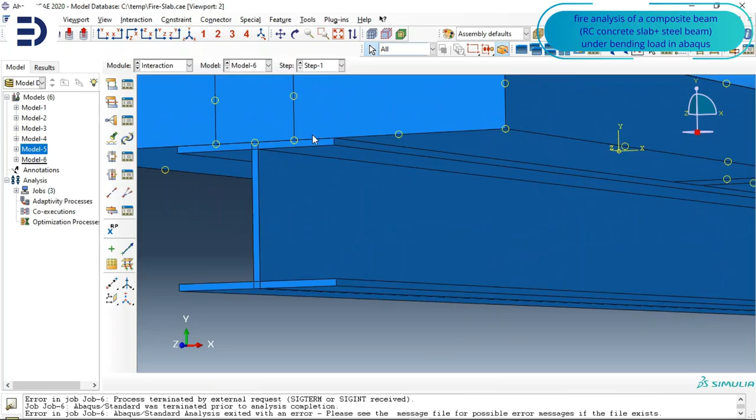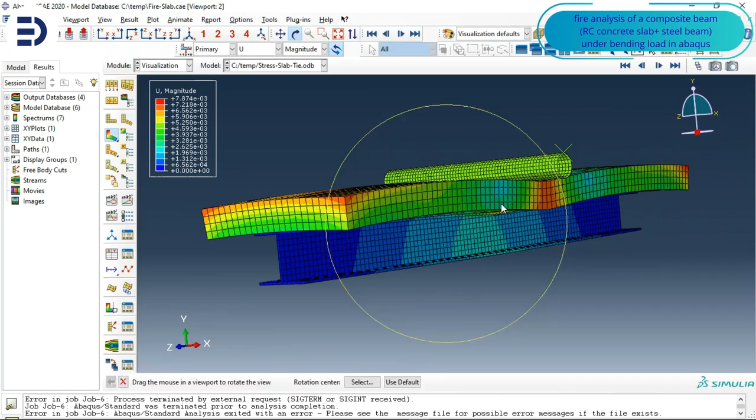Fire analysis and simulation in structural engineering is a specialized discipline dedicated to predicting how buildings and structural components behave when exposed to elevated temperatures during fire scenarios. The primary objective of this field is to ensure life safety, evaluate fire resistance, and design structures that can maintain stability and load-bearing capacity for a sufficient duration to allow evacuation and firefighting operations.

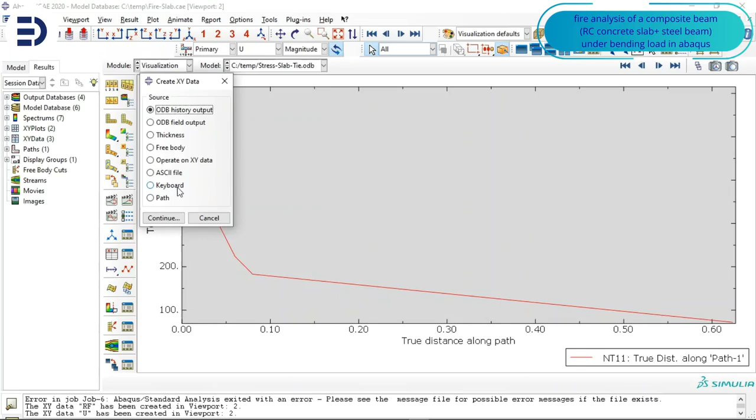Fire simulation integrates thermal effects, material degradation, boundary conditions, fire dynamics, and structural mechanics in order to realistically capture the complex interaction between heat exposure and structural response.

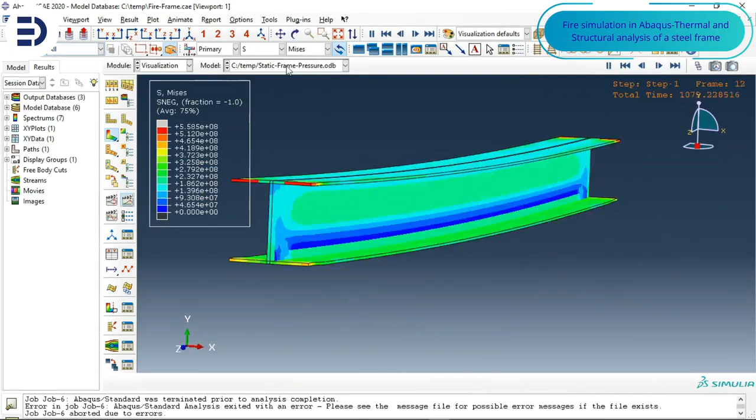At the core of fire analysis is the estimation of the thermal loading that structural components experience during a fire. Engineers must first define the time-temperature history imposed on the structure using appropriate fire models. These may range from standard fire curves used in design codes to more advanced parametric or natural fire models that account for ventilation, fuel load, and compartment geometry.

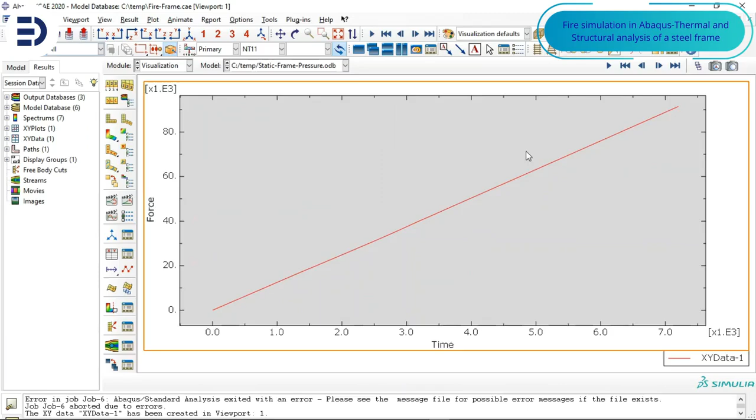In sophisticated analyses, computational fluid dynamics can be used to simulate flame development, gas temperatures, heat fluxes, and smoke movement. The resulting thermal data form the basis for subsequent structural analyses, as they determine how heat is transferred into beams, columns, slabs, and connections over time.

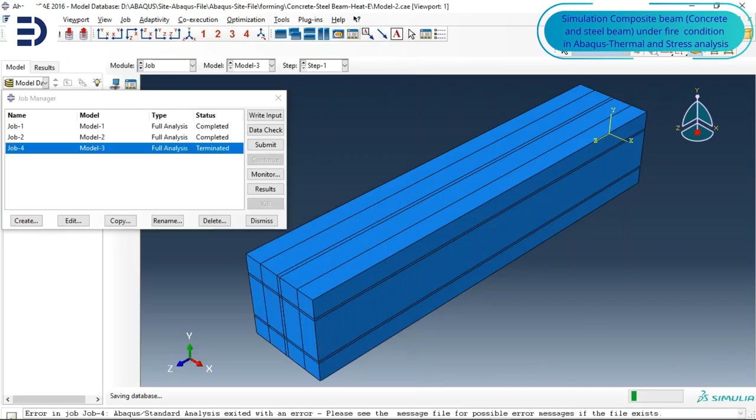Structural materials exhibit significant changes in behavior when exposed to high temperatures. Steel components experience a rapid reduction in stiffness and strength as temperature rises, with substantial loss of load-bearing capacity occurring at elevated temperatures. Thermal expansion of steel can generate additional internal forces in restrained members, while reduced yield strength may trigger instability and buckling.

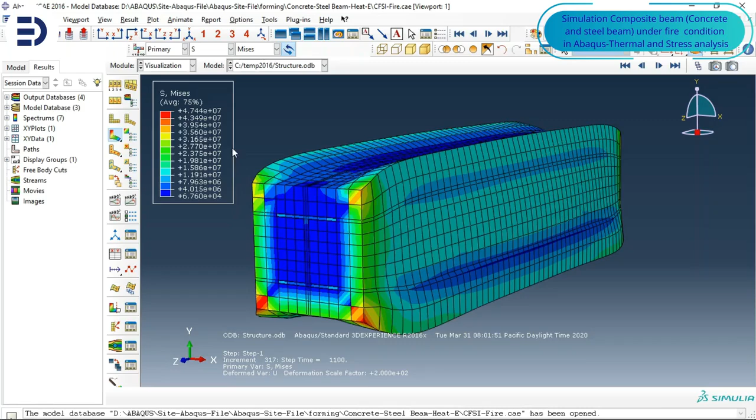At very high temperatures, beams may develop catenary action, redistributing loads through axial tension rather than bending, and connections such as bolts and welds often become critical points of failure. Accurate fire analysis therefore requires temperature-dependent material models consistent with established design standards and advanced finite element formulations.

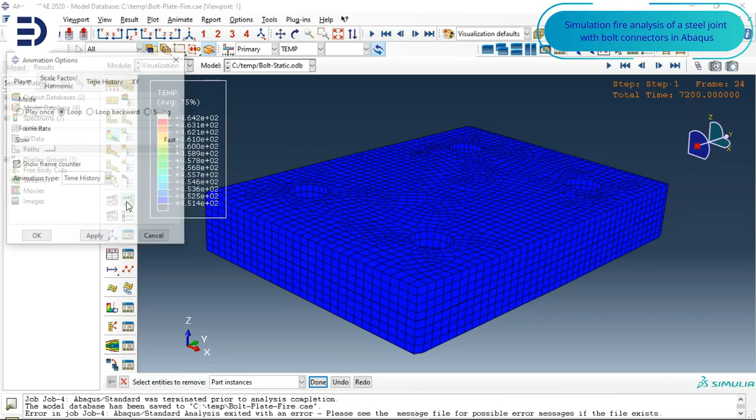Concrete structures respond differently to fire exposure. As temperature increases, concrete strength and stiffness decrease, particularly in compression, and severe thermal gradients may develop across slabs and walls. Reinforcement steel embedded within concrete must be tracked separately, as its temperature rise governs the residual capacity of reinforced concrete members.

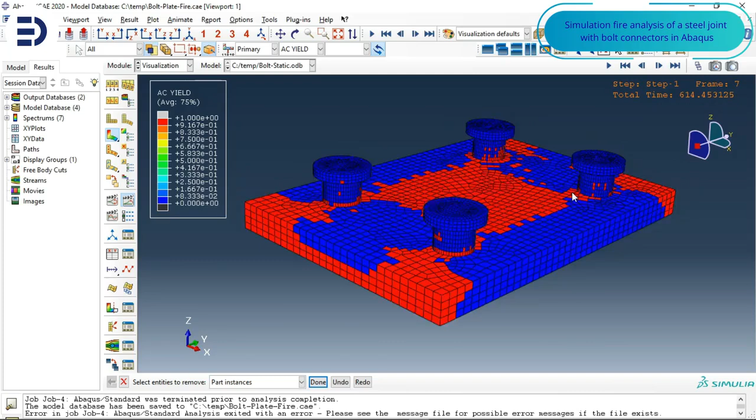Fire-induced cracking, degradation of bond between concrete and reinforcement, and spalling caused by moisture pressure and thermal gradients can significantly reduce structural capacity. These phenomena must be incorporated into nonlinear material models to realistically predict structural performance under fire conditions.

The response of individual structural elements under fire loading varies according to their function and boundary conditions. Steel beams subjected to fire typically undergo downward deflection as temperatures rise, forming plastic hinges and potentially transitioning into catenary action at extreme temperatures. Steel columns are particularly sensitive to fire due to buckling, as their axial load capacity decreases sharply with temperature, often governing fire protection requirements.

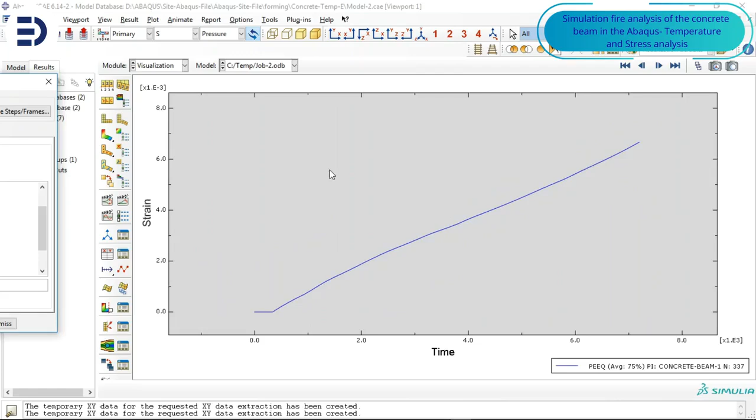In steel frames, global behavior such as load redistribution and restraint effects can either enhance redundancy or increase thermal stresses, with connections frequently dictating the overall failure mode.

For concrete beams and slabs, temperature gradients generate internal stresses that lead to deflection and cracking, while membrane action may develop at high temperatures. Concrete columns experience altered buckling and crushing behavior, with spalling posing a major risk to load-bearing capacity.

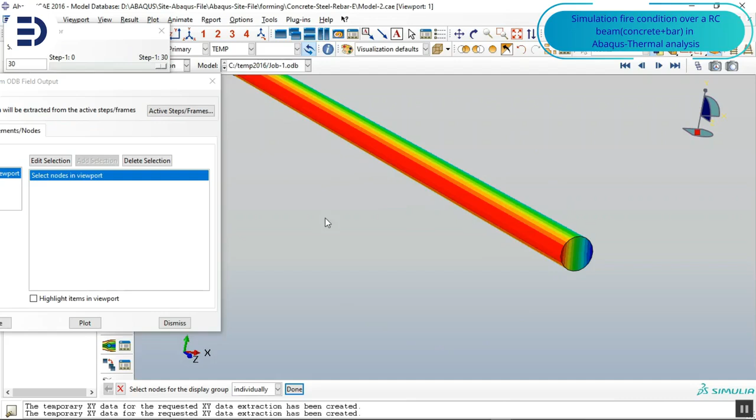Fire analysis can be conducted using simplified hand calculations based on design codes for preliminary assessment and quick verification, or through advanced finite element modeling for detailed evaluation.

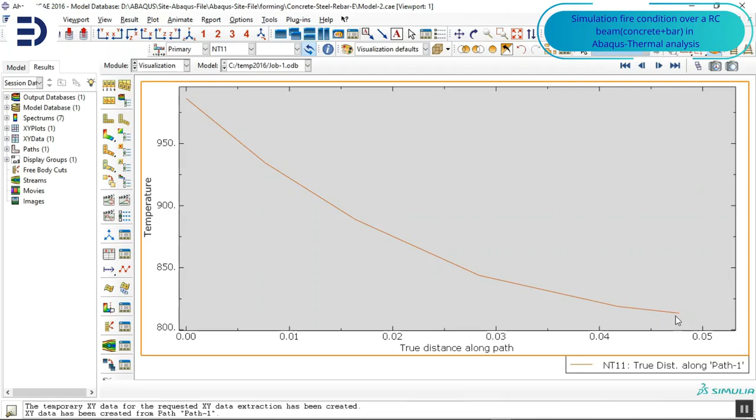In numerical simulations, thermal analysis is first performed to compute temperature distributions using appropriate convection, radiation, and material properties. These temperature fields are then applied in structural analyses that incorporate temperature-dependent material laws, geometric nonlinearity, and connection flexibility. Simulations may be sequentially coupled or fully coupled, depending on the required level of accuracy and computational effort.

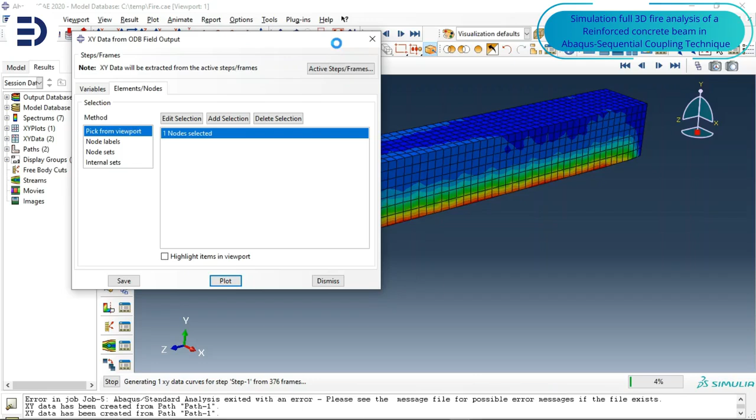Modern practice increasingly relies on performance-based fire engineering, which moves beyond prescriptive code requirements to evaluate how a specific structure behaves under realistic fire scenarios.

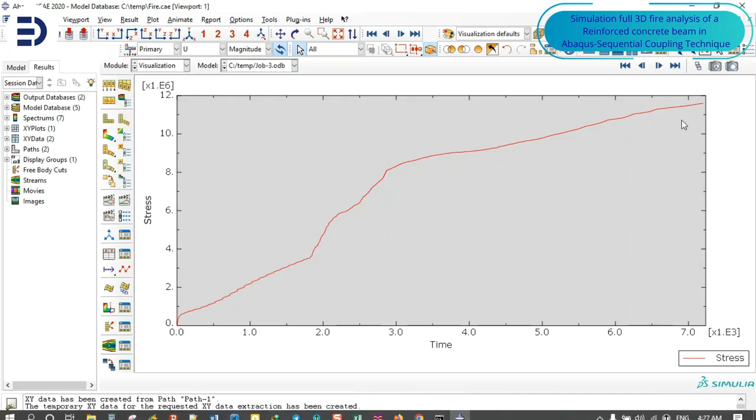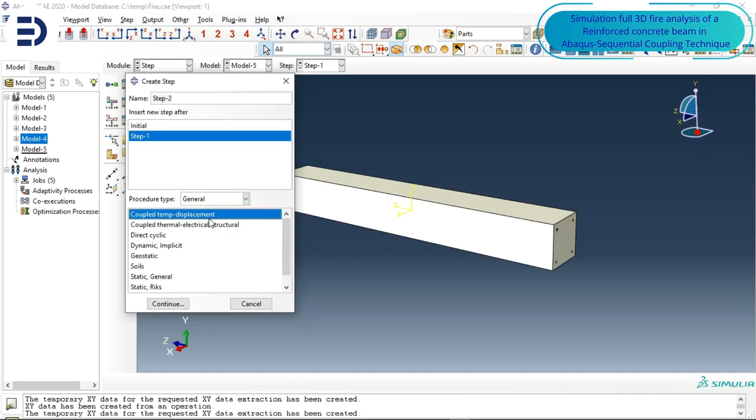This approach involves defining credible fire events, performing detailed thermal and structural analyses, and assessing safety margins, stability, residual capacity, and failure mechanisms. Performance-based fire engineering is widely applied in complex structures such as high-rise buildings, industrial facilities, tunnels, bridges, and steel-concrete composite systems.

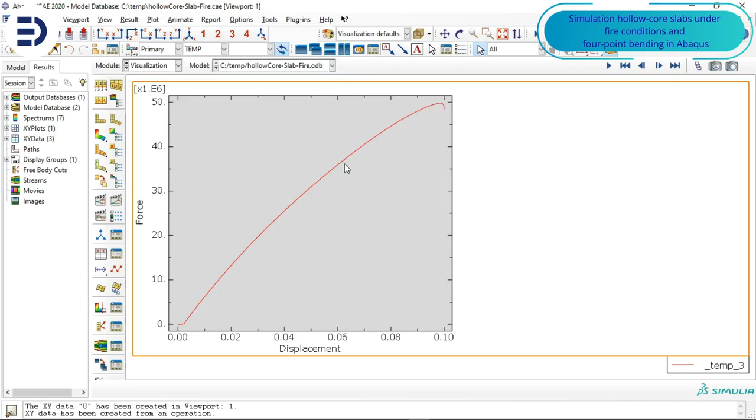The outputs of fire simulations typically include temperature distributions in steel and concrete, member deflections and rotations, stress and strain histories, residual load-bearing capacity, time to failure or fire resistance rating, and identification of local or global failure modes.

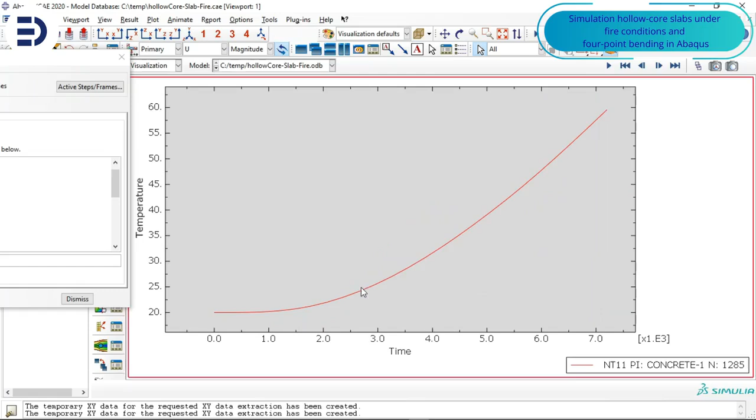These results support fire-resistant structural design, optimization of fire protection systems, assessment of fire-damaged structures, research into new materials and configurations, and regulatory approval of performance-based designs.

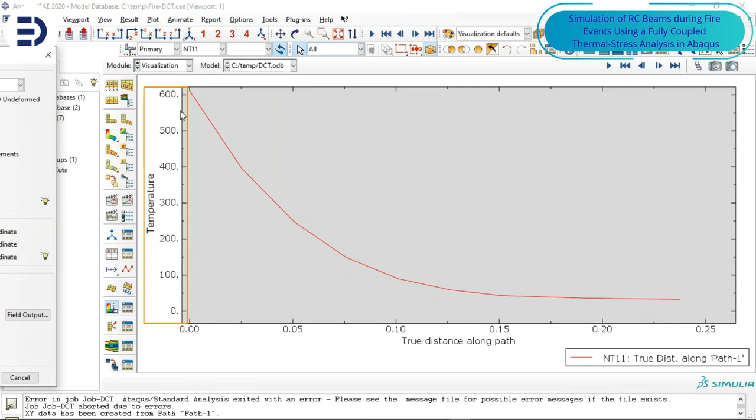In this comprehensive course, you will explore both fundamental principles and advanced applications of fire analysis and simulation using Abaqus software. Through 12 detailed, hands-on tutorials, you will gain a strong theoretical foundation along with practical modeling experience.

Each tutorial includes step-by-step video instruction, Abaqus model files, simulation codes, and a relevant research paper to support effective learning.

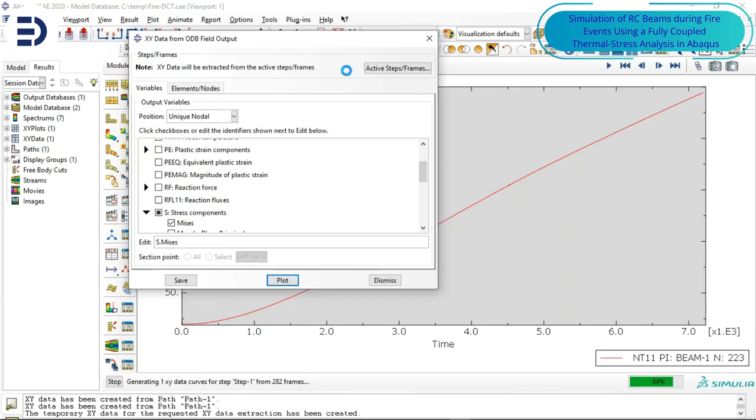The course addresses a wide range of engineering applications, including fire analysis of steel timber beams, hollow core slabs under fire conditions, timber beams exposed to fire loads, steel joints with bolts under fire, steel frame fire analysis, fire simulation of reinforced concrete beams and columns, fire analysis of steel beams and columns, and dynamic bolt failure simulation, providing a comprehensive and applied understanding of structural behavior under fire exposure.

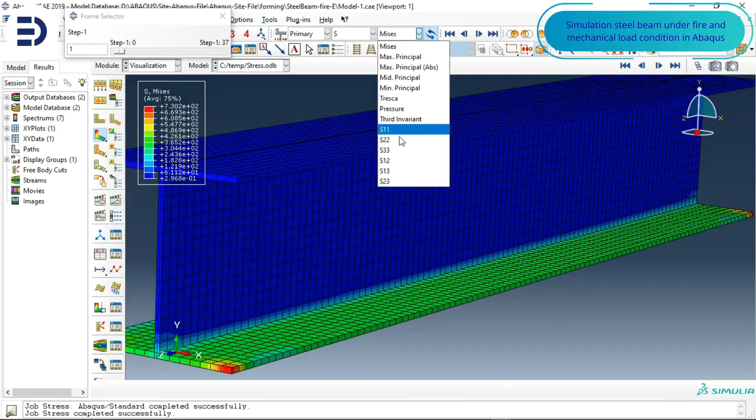FEM provides a powerful and flexible framework for realistically analyzing and simulating concrete structures. By capturing material nonlinearity, cracking behavior, and complex geometries, engineers can predict performance, optimize design, and ensure safety and reliability.

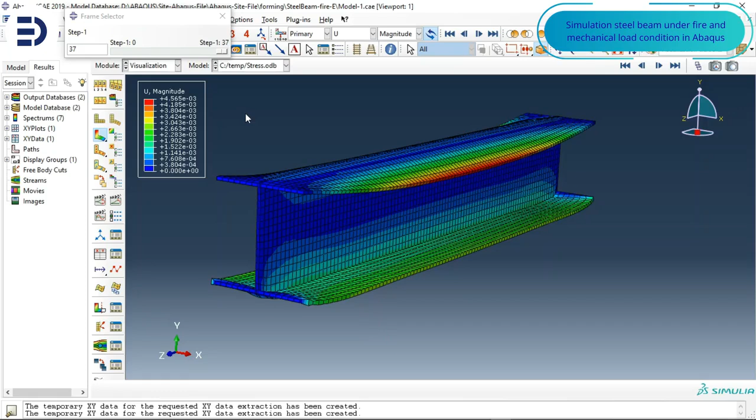This package is ideal for mechanical, structural, civil engineering students and researchers. With lifetime access to downloadable resources, you can learn at your own pace anytime and anywhere.